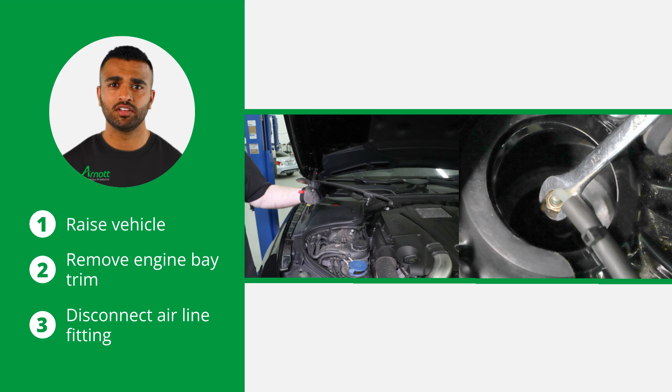Now, remove the used air line fitting from the air hose and discard it. To do this, remove the collet and the remaining fitting will slide off the air hose. Then remove the applicable front wheel.

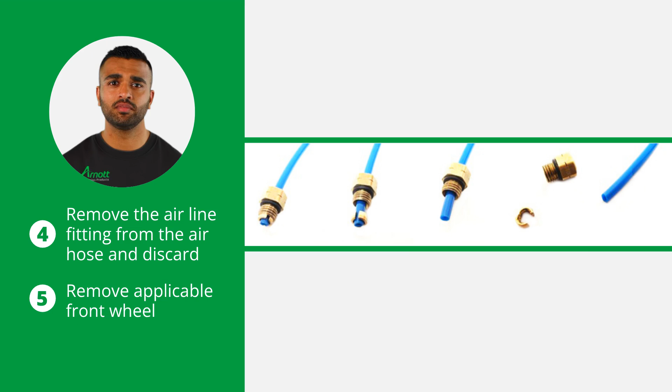Disconnect the two electrical connectors from the strut. Now, unroute the lines and disconnect the strut wire harness from the lower mount of the strut.

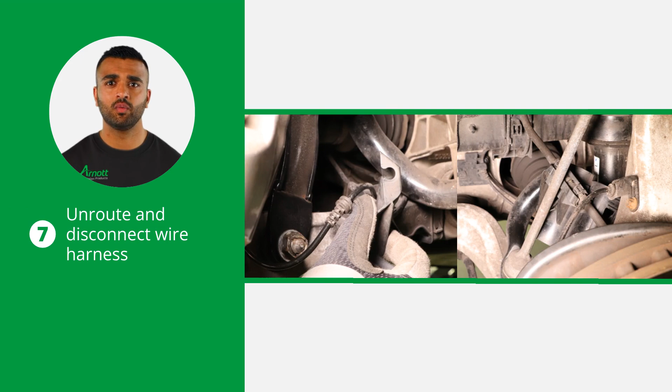Continue by removing the lower strut bolt and nut and the three top mount nuts. To complete the removal process, remove the strut from the vehicle.

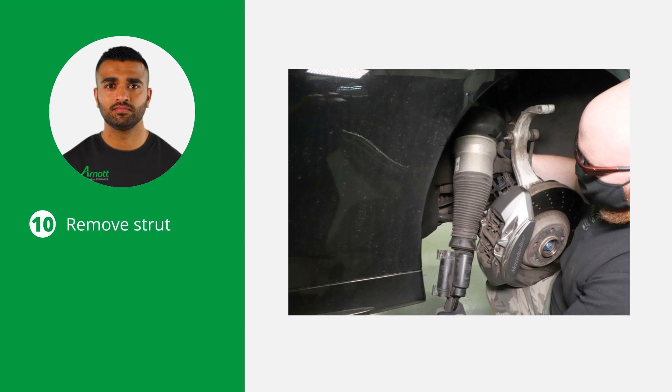Before starting the installation, remove the shipping plug from the check valve and install the Voss fitting from the provided accessory kit onto the Arnott air strut. Remove the shipping pin from the Voss fitting.

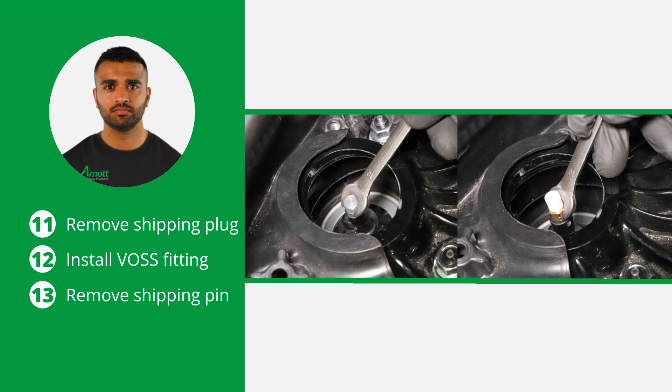Now install the strut in the vehicle. Make sure to tighten all nuts and bolts to the vehicle manufacturer's specifications during the installation process. Reconnect the spindle to install the bolt and nut.

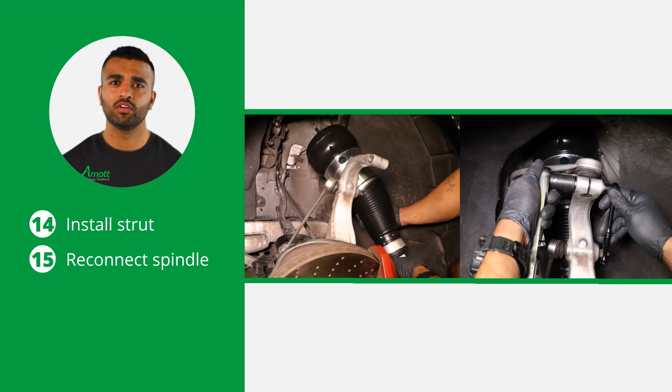Continue by installing the lower strut bolt and nut and the three top mount nuts provided in the kit. Connect the two electrical connectors to the new strut solenoid. Now reinstall the strut wire harness using the provided zip tie and reroute the lines.

Push the air line into the air fitting on the top of the strut until it is fully seated. Now finish the installation by reinstalling the applicable engine bay trim. Then reinstall the applicable front wheel and inflate the air strut per the vehicle manufacturer's specifications. Now lower the vehicle and you have completed the installation.

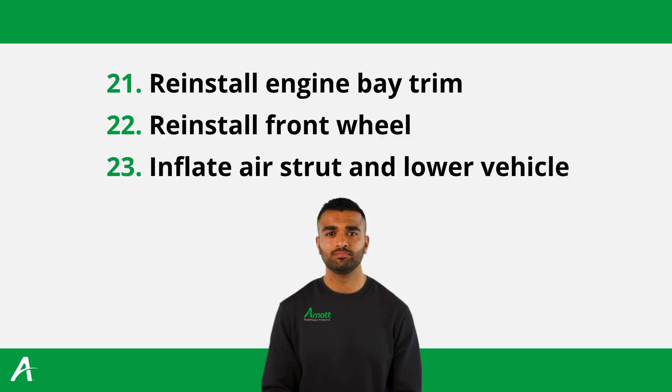Thank you for following our guide on replacing the front air struts of a Mercedes-Benz S-Class W222 with an Arnott part. Proper installation ensures the longevity and performance of your vehicle's suspension system. Stay safe and happy repairing.